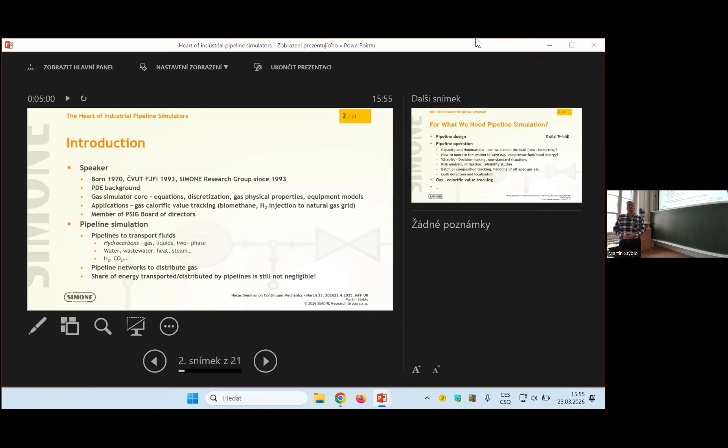Pipelines are also used to distribute gas along areas nationwide, citywide, local networks. 100% electrification is deemed to be too costly in many regions, so let's stick with the hydrocarbons in pipelines, mainly hydrocarbon-based gases inside of a pipe.

For what we need, we simulate what's happening inside pipeline networks. Quite naturally, to design the pipelines or to plan their extensions, eventually plan their retirement. We also need to support daily pipeline operation.

The pipeline operators carry some kind of contractual capacities they are obliged to handle for the shippers moving commodity using their services. And there are some short-term, like daily cycle nominations within the already signed capacity contracts. So they need to verify, can we handle the next coming load under the current conditions, taking into account equipment outages, maintenance work, etc.

How to operate the system in terms of minimizing fuel, gas, or compressor energy consumption? Quite natural question. What ifs, decision-making support, how to handle non-standard situations before they happen, make some emergency plans, or react to some non-typical situations.

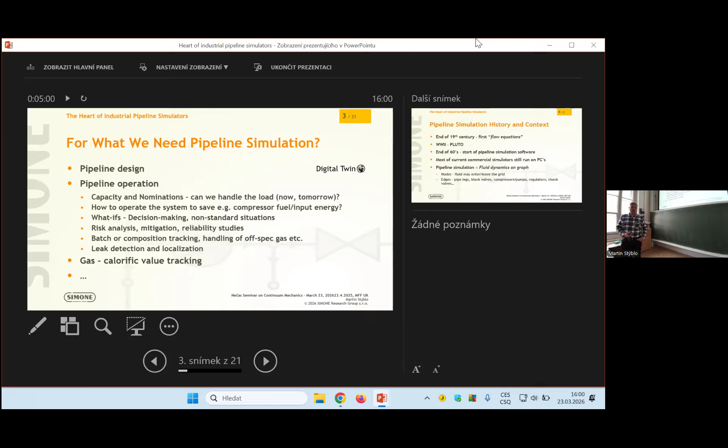There is a nice buzzword you might see in the corporate lingo: digital twin. Everybody wants to sell digital twins. That's the model. I don't feel it's the right way, and my diligent colleagues, the technical people, we are always laughing because it's a buzzword. You need the model, and it doesn't really depend whether it looks exactly like a SCADA system interface. That would be the ultimate digital twin. But is this what I always want? I need a model. I have a wide context of using that model. So let's talk about modeling and forget the buzzwords.

Some little introduction to history of the industry and some context. The stuff being transported by pipelines, I mean fuel things.

Town gas era started mid 19th century with a coal gas called town gas, produced locally in a city gas works, and then the network to distribute the gas emerged.

So since, say, the end of the 19th century, we can see the first flow equation in terms of how to calculate a pressure drop against flow rate over a pipeline segment.

Crude oils and liquid products started to be transported by rail, in barrels or in railway tanks.

There is always a milestone in the history of our industry being emphasized, and that's the World War II project, the Pluto pipeline under the ocean, because it was a tremendous effort to design it, and most probably that was one of the triggering events in the history.

It's true that during the 20th century, we see pipelines transporting crudes, pipelines transporting natural gas on long distance, transmission pipelines. Since during the 20th century, pipelines are all around the continents, then they go undersea from production platforms on seabed to onshore receiving terminals. So the plethora of pipelines is still growing.

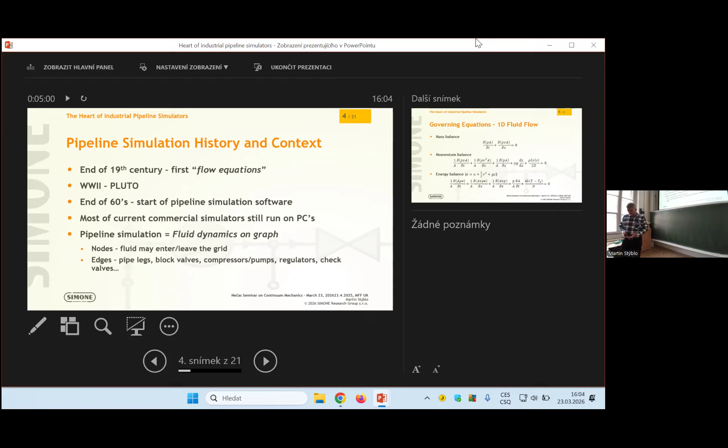The governing equations on each edge of the graph view the flow as a one-dimensional approximation. This is not rocket science. Imagine a pipe with cross-section denoted by A, and we have a mass balance in terms of continuity equations.

All the quantities are assumed to be cross-sectional averaged values of density. Mass flux is A rho V, etc. So we have a mass balance in terms of continuity equation.

We can derive the momentum balance in a form where at least the three terms from the left look exactly like quasi 1D Euler equations on a nozzle with cross-section A. The friction forces, including all the turbulence modeling, are mimicked by Darcy-Weisbach's law, so a magic friction coefficient does all the work.

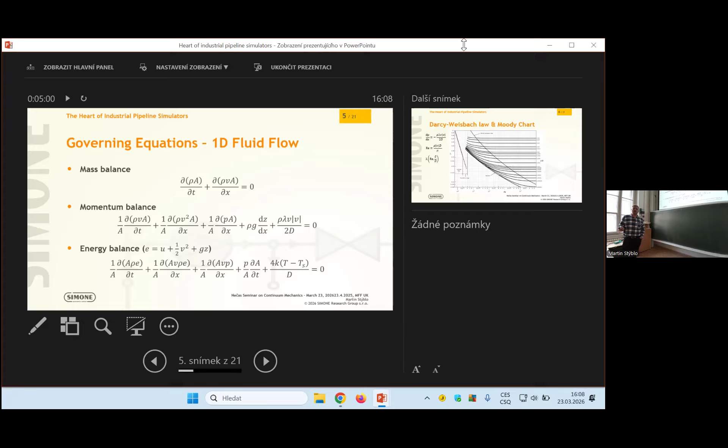The first thing is the magic of turbulence and laminar flow hidden in the Darcy-Weisbach friction factor, denoted by lambda. Everybody loves the Moody chart, saying that friction factor is a function of Reynolds number and the dimensionless ratio of wall roughness against internal pipe diameter.

Everybody knows that 2000 Reynolds number is the magic value, true for rounded pipe. We might have fully laminar flow in the Hagen-Poiseuille equation. Then there's a known transition zone when things go wild because turbulence kicks in, but we don't care - lambda hides this for us. The friction factor generally jumps up dramatically.

Since we are far from the transition range, with another magic value of 4000 for Reynolds number, the traditional turbulent part of the Moody chart kicks in, and we are happier because then we see typical behavior.

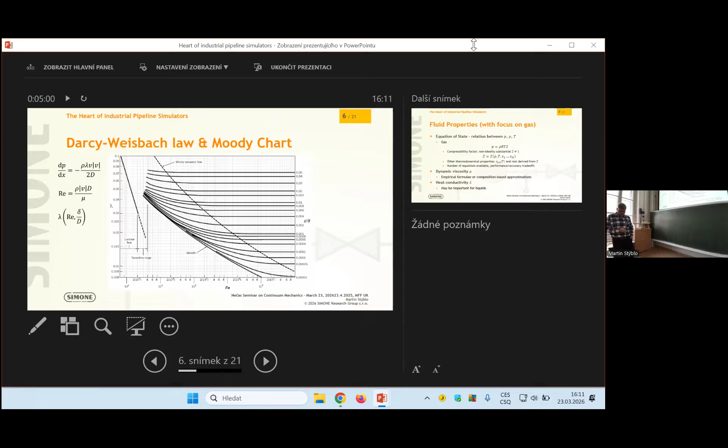We just need to do some conservative jump back to laminar law if we ever need it. But quite easily, if you look at a natural gas pipeline, you are almost always somewhere behind the transition range. So that's it - that's the rocket science about turbulence.

Another important thing: everybody knows the set of equations has to be closed by an equation of state, a constitutive relation between pressure, density, and temperature. For gas, we tend to use an equation of state expressed with compressibility factor, and in our area of interest, gases are no more ideal, so Z is not equal to a fixed one.

Z is something usually given by the most popular and used equations of state as some expansion in terms of density or molar density, temperature, and composition.

We also have to play with some other thermodynamic properties. As a consumer of thermodynamics, give me a Cp of ideal gas, and the rest can be derived from the equation of state.

There are typical equations of state intended for pipeline gas quality regions. There are equations of state developed for handling phase equilibria. There are simple formulas for handling low pressure regions. Usually the packages offer a selection of many possibilities, and it's up to the user to take the reasonable equation of state. And in fact, this choice is not negligible.

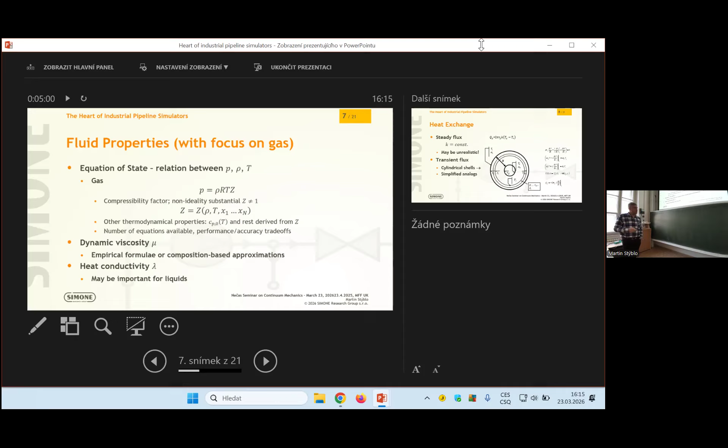Eventually, we may ask about heat conductivity. Honestly, it might be of interest for crude oils, for liquids. For gas, the interface layer, the heat transfer, the wall heat transfer coefficient is high enough to be neglected in the chain of heat transfer effects.

The heat transfer, if it comes into play, is also something particular we have to tackle with. Why? If you compress the gas...

Just to have some idea, a transmission pipeline might roughly run onshore at 75 bar maximum operating pressure, and the compressors will run for, say, somehow 50-something bar up to 70 through the compressors, and then the next pipeline leg, which is like 100 miles, 150 kilometers, say roughly, and you will lose those 20 bars roughly along the line thanks to friction. So it's another place and time to compress the gas again closely to the operating pressure and then back. So you have the sawtooth diagram along the pipeline.

And after compression, the gas is heated pretty much. On the other hand, nobody wants to see too much degrees centigrade entering a pipeline that is coated by some bitumen corrosion insulation, because if this melts, you are in big trouble. If you destroy that, you are going to dig 20 miles of pipeline downstream of compressor stations. So we have to play with non-trivial temperature of gas, especially in transmission.

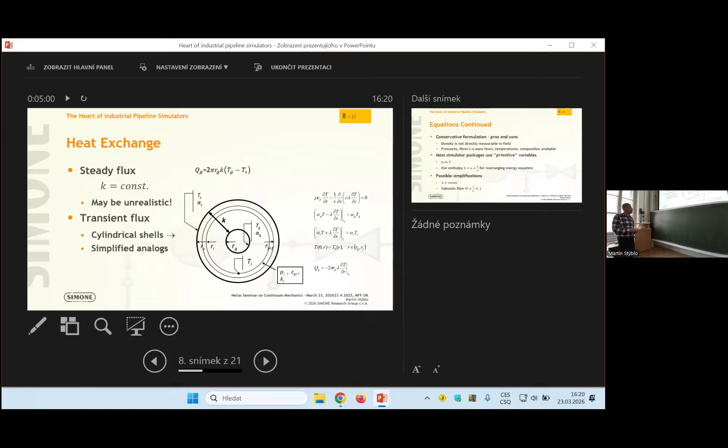Equations to be continued. What do we do with the equations? You saw that the idea to write them down resembles the conservative form of equations. Nice, beautiful. But there is one technical issue.

Density is something you don't measure directly on a field in the pipeline. You can see pressure meters, flow meters, temperatures. Sometimes you might know the supplied fluid composition. So most simulators tend to rewrite the equations into something we might call primitive variables. Pressure, mass flow, that's quite nice. A times rho times V makes sense.

But pressure and temperature are much better to handle directly because you need to face boundary conditions, equipment set points, and measurements. The way to do that usually is by introducing enthalpy, or in fact total enthalpy, including potential energy, and introducing it into the energy equation. Then there are some nice thermodynamical ways to say that the enthalpy derivatives can be translated with Cp to temperature and pressure derivatives. So that's how most of the software handles the equations.

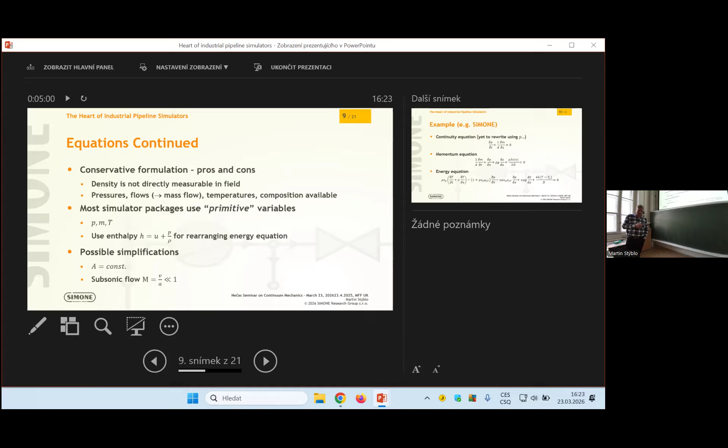There are some other possible simplifications, like fixing pipe walls, saying A is constant. Some people claim it's bad because it affects the wave propagation speed of sound. On the other hand, it depends on the application. I have less issue with it—in our system we keep the cross section fixed for gas pipelines, not depending on pressure. For compressible liquids, you are typically in a subsonic region. You might face sonic effects like throttling in nozzles or ruptures venting the pipeline, but these can be handled locally, and the fluid in pipes tends to be slow, so there is a chance to get rid of some terms if you assume subsonic flow only.

As a little example, this is how the job looks almost in Simone, our system. Here we introduce pressure, so there might be some funny coefficients. Here we introduce the subsonic flow assumption, getting rid of some ugly terms, and we have a very nice base of equations, using a staggered grid and finite volume approach. Very nice thing. Energy equation, as indicated, playing with energy and enthalpy.

You finally get something like a derivative of T times rho times Cp. There is some funny pressure term, not avoidable. There is a term that can be linked with the Joule-Thomson coefficient of the fluid, and the Joule-Thomson effect is really visible on gas lines.

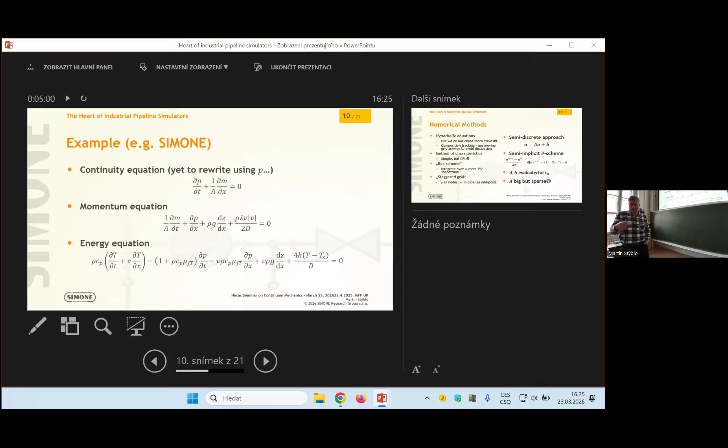If you run a heavily loaded transmission pipeline, you can feel the slight subcooling of the gas because pressure is going down due to friction losses, and thanks to the Joule-Thomson effect, the equilibrium shifts. If things stabilize, you can see that the gas at the downstream end of a long pipeline might be slightly subcooled, a few degrees centigrade below the surrounding soil temperature. And there is the heat exchange term, which in transient modeling is supposed to be produced by the interface with the heat flux model.

Numerical methods we use to tackle those equations do, of course, utilize the hyperbolic nature of the equation system. On the other hand, we don't need high resolution schemes because we are not chasing shock waves. We are, in fact, interested in contact discontinuities, for batch tracking and composition tracking.

Not surprisingly, a more effective way is to introduce some moving grid for the quality nodes rather than fight excessive numerical dissipation of any fixed grid scheme. We don't like to play with high resolution schemes because their computational stencil is wide, and we would like to benefit from a finite graph-like approach to easily handle the network topology.

So the typical methods used inside industrial simulators are still sometimes the method of characteristics, or potentially some other way to do upwinding, with either explicit time stepping or eventually semi-discrete formulation, but with a plain explicit scheme there is no escape from the Courant-Friedrichs-Lewy condition. Simulators doing this can do incredibly well in terms of catching water hammer effects and similar phenomena, but they are slow.

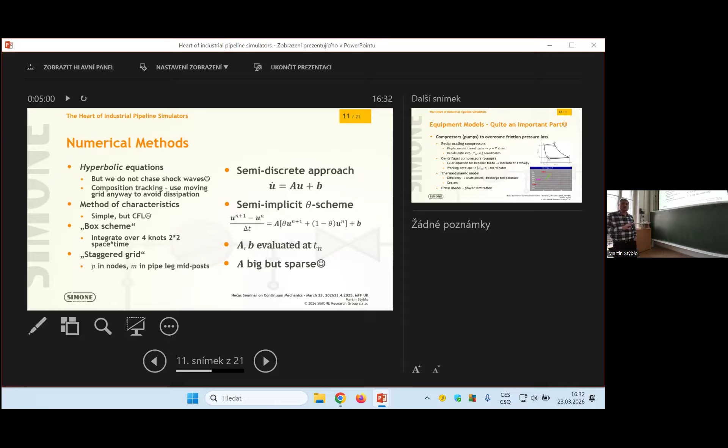So many commercial softwares use some commercial sparse solver, and they are pretty happy. The dimension is on the order of 10 to the 5 and more. 100,000 nodes is quite rare to see, but tens of thousands of nodes is a common thing.

And I'm gradually marching till the end. So equipment models are a big part of our job. Basic equipment are compressors, eventually pumps for liquids, to overcome the pressure loss along long distance transport. Still, transporting energy by pipeline is a relatively cheap thing. Electric wires are not perfect either, so still be happy for pipelines we have.

Old reciprocating compressors, this is in fact a displacement-based device that has throws and pistons pumping. So you start from the PV chart, but you probably need to integrate the PV chart and translate it into something better. The something better is usually adiabatic head for gas and intake volumetric flow.

For a pump, it would be head, elevation head, or pressure increase, and suction flow.

Because a centrifugal compressor is a device that translates the rotation of the impeller, via the famous Euler equation for the impeller blade, into increase of enthalpy of the fluid that is rotated through. So with some work here, our natural field to play in is adiabatic head, which is isentropic enthalpy difference, and intake volumetric flow rate.

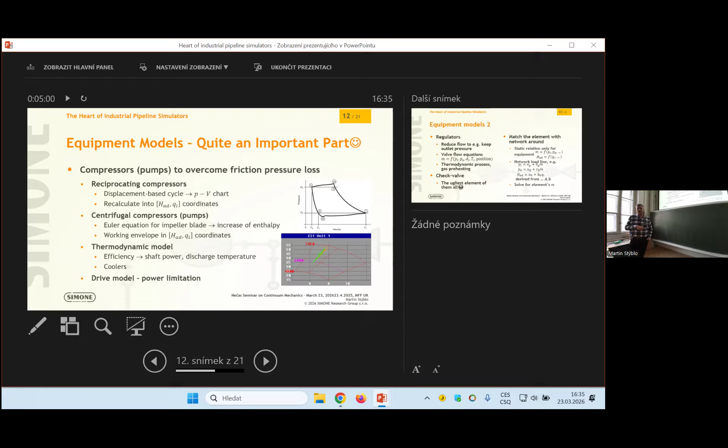The job of equipment modeling is then, in fact, to be robust against all the crazy changes the network can throw around, and to always give some reasonable answer from the equipment towards the network.

Another type of equipment are, for gas lines, regulators, which throttle the gas. Typically, you go down from a transmission line to distribution, which is operated at a lower pressure level. So you need to safely interface them. You have a regulator that regulates a flow rate in a way not to exceed the outlet pressure, or it's directly flow controlled. So basically, it's a nozzle that throttles the flow.

Sometimes you might want to go into detail, and you have a valve sizing equation that plays with the sonic effects inside of the geometry. And of course, there is some thermodynamic process - it's almost isoenthalpic throttling. So you have Joule-Thomson cooling or a little heating with hydrogen. And if you are cooling enough, natural gas roughly goes half a degree centigrade per 1 bar pressure step down. You don't want to have freezing things, so you might have to preheat the gas.

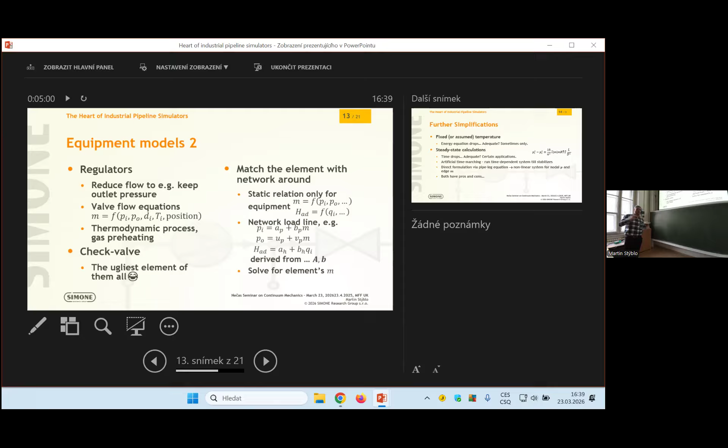Further simplifications: we can throw away temperature, saying it's fixed or assumed. The question is if this is adequate. It's nice to have like pressures, mass flow rates model, but still the question is if it's adequate or not. I would say not adequate for transmission line with compression, pretty adequate for distribution system that is not heavily loaded, and you know that the gas inside tends to settle in reasonable equilibrium with the soil temperature. But you might still not want to forget the temperature, because summer, winter, different temperature, different line pack under the same pressure. So it still might require some attention.

Another thing is steady state calculations might be easy. You drop time derivatives, and there are basically two approaches. One approach is really start from steady formulation. The other approach is artificial time marching. Both are used, both have their pros and cons. In fact, flow equations from the old century, these were those.

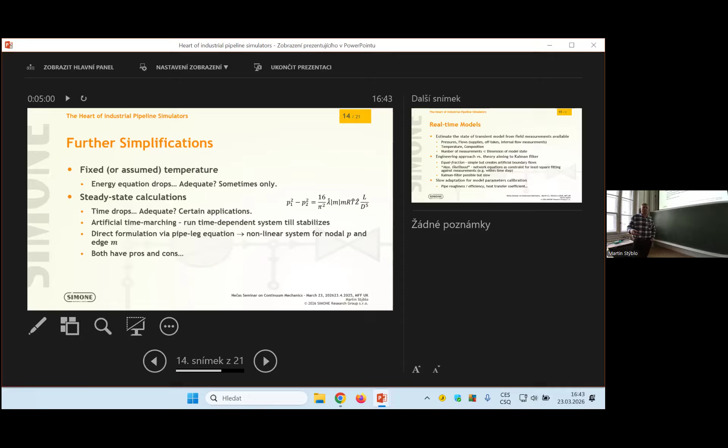On the other hand, those direct formulations tend to spend a lot of effort to be robust against ill-posed problem formulation, not enough boundary conditions, stuff like that. So I met people saying we throw away a steady approach and use artificial time marching because it's easy and even more natural to diagnose this kind of problem. I could agree. We do use time marching.

Okay, real-time models. That's something that makes sense. If you want to support decision making on a real pipeline, you need to estimate the state of the model right now to be able to run look-ahead simulation. What happens if we do nothing and meet tomorrow's nominations? Will we survive or not? Starts maybe some what-if games and stuff like that.

So basically, the typical issue is that the problem dimension is big, but the number of measurements available on the system is much, much smaller. So some sort of state estimation technique is definitely used. What the industry usually tends to use is sort of engineering shortcuts. Most typically, it's something that some people can even, with some inspiration, call the maximum likelihood state estimation.

In a very short, almost vulgar way, I would say we need to fit to our measured values in some least square sense, but we know that we are constrained by state equations for the transient model. So that's the way how this is expressed.

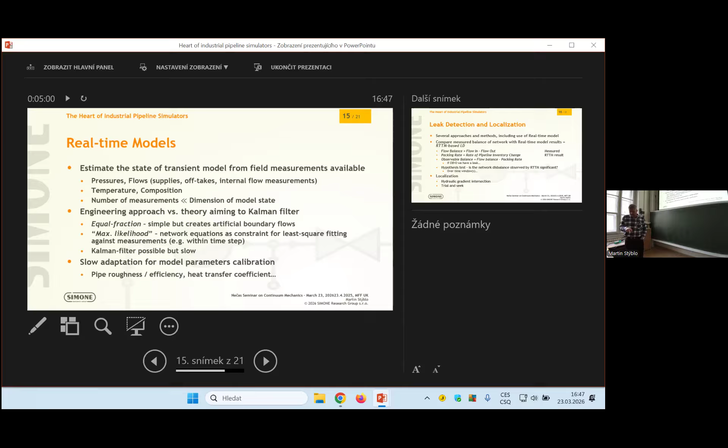Most of the software uses either some kind of calibration tools, or even within the real-time model, some slow calibration, like of roughness or pipe efficiency, to improve the estimated network model state. Once you have it, you can usually deliver the real-time system as a state estimator and automated look-ahead. Eventually, if you have a state estimator, you may start looking for leak detection.

Typically, a bit different state estimator is used for leak detection. The basic idea - in fact, leak detection is a tricky thing. You might have a number of approaches: external ones, like sensing the fluid outside, and internal ones, using the field measurements to retrieve information about what happened.

A typical way is RTTM, real-time transient model-based leak detection, which is based on very quickly running the real-time model to estimate the packing rate, especially if your fluid is compressible. The packing rate is of big interest. You measure the flow balance, the outer flow balance, flow in, flow out - you might know it. You use the real-time model to get the estimate of packing rate.

So then the difference - metered flow balance minus packing rate - is the observable balance. If it is small, if it is zero, things are okay. If it is big enough, we have an offtake we don't know about, so we most likely have a leak.

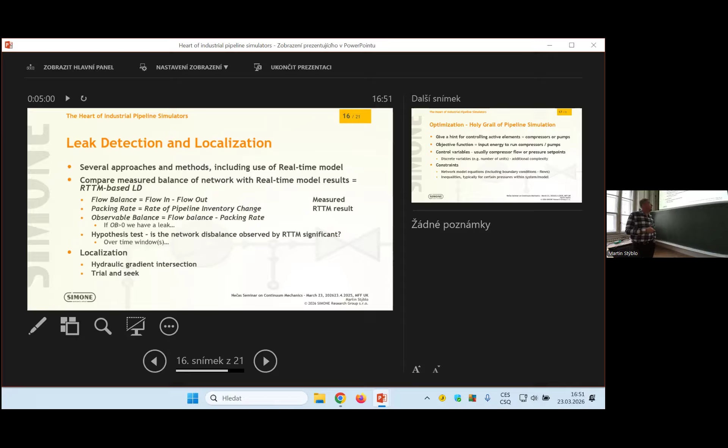Optimization is the holy grail of the industry - the hint how to operate, especially those energy consuming things like compressors or pumps, in order to transport what we need to transport and consume as little energy as needed. That's the goal, so the objective function is fuel gas, or simply the input energy.

Control variables are usually flows, eventually pressure set points of those active devices. And a little disaster comes if you want to play with discrete variables like number of units needed. This is a bloody combinatorically difficult issue, so some sort of heuristic game is usually played.

Our constraints are in fact the network model equations, because what's happening is interconnected with the network behavior. And of course, typically we have some inequalities - we would like to save our compression work, but please keep the very downstream at least at 50 bar, because it's a contractual value. The cheapest way is to forget things, and for a while it will stay, but we need those kinds of constraints.

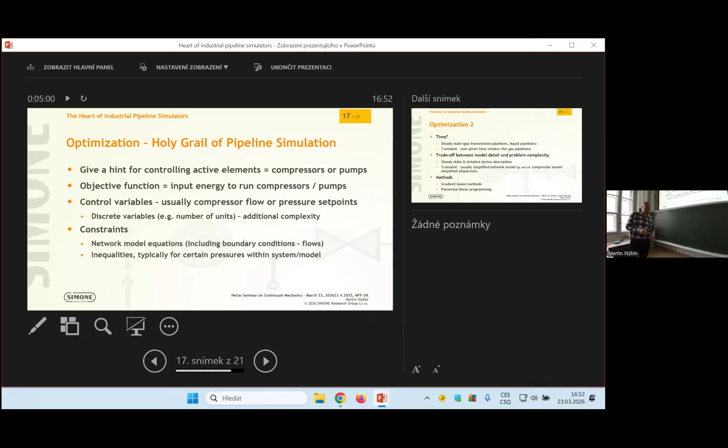Question is, what's the time horizon, or what state of network, or development of network to optimize? Steady state optimizers are useful for liquid pipelines because transients are quick, and those lines are really operated jumping from one steady state to another. So that makes sense. For gas, this makes sense for long transmission lines.

They still play some game, but if it's around the big trunk load, the steady state approach is still technically feasible. Or, and this is a true holy grail for gas optimization, transient - how to do things to survive the next gas day, given load, given constraints, to move what we need to move, stay within our constraints, and do it as cheap as possible.

So quite naturally, there is always a trade-off between how detailed we model the physics and how complicated the whole problem is. Typically, steady state optimizers with a device description up to very detailed are something like industrial standard. There are transient optimizers - in most cases they are linked with some simplification, either network model or compression model, especially in academic research.

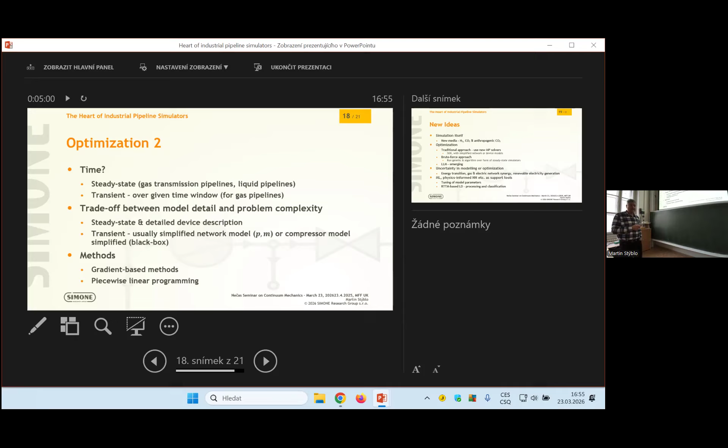For the discrete things like number of units, either some heuristic was used, or there were attempts to use linear programming, or piecewise linear programming mixed with integer variables, and the results, sorry to say, are often mixed. So it's still an open place.

So I'm gradually going down to our end with some new ideas. Simulation itself is mainly now tackling new media. Hydrogen is a gas - it's a funny gas, but still a gas. CO2 is another story. For a long time this CO2 is an ugly gas by its behavior.

Anthropogenic CO2, which is from the carbon capture and storage chain, is CO2 being captured from fumes. It's impure, and there is a huge impact of impurities on the physical properties.

The idea is to gather things, and then gas phase for the gathering system could be technically feasible. But the inevitable CO2 emissions - sorry to say, Greta, we need crude oil refineries to have plastics and stuff like that, and we'll still need that. There are some industries we will still need, so we would need to capture and probably store in depleted fields, for example.

So the long distance transport is assumed to be in the dense phase region, and then you have ugly stuff like density close to crude oils, and also compressible. So that's something - with some care you can play with a single phase simulator, but with some care. You have to circumvent the two-phase area, which, thanks to impurities, is moving.

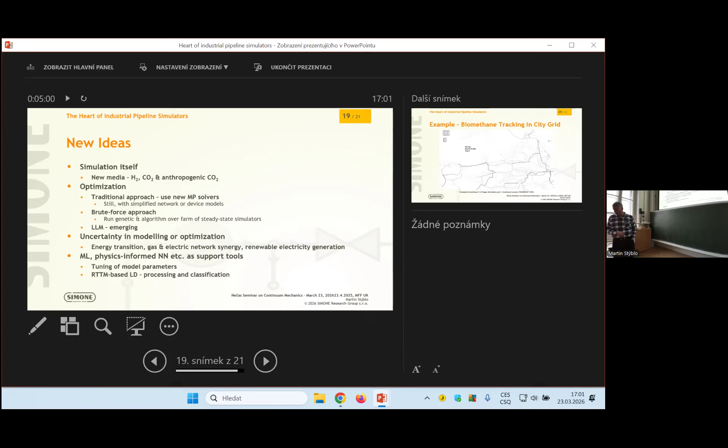My time is over, I hope you are not over.

Last but not least, we need some fun. This is just to enjoy.